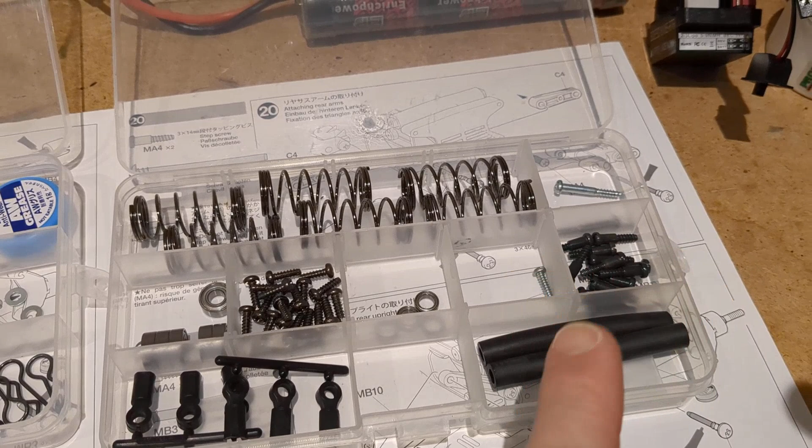Let's start over here. You get some rubber inserts for the shock absorbers, so they're not just spring, or oil dampers - these are the rubber-like resistance shocks. I have had these before, can't remember what build, definitely on the Ford Escort I've got. Here's your springs, 6 shocks because we've got 6 wheels, various step screws, various ball bearings. These are the shock absorbers themselves.

Then over here we've got some split pins. These thicker springs are for the bumper, I believe. These will be the wheel nuts. These ball joints, I think, will be for the steering. Various other rods and ends. So that's what's in the C parts bag.

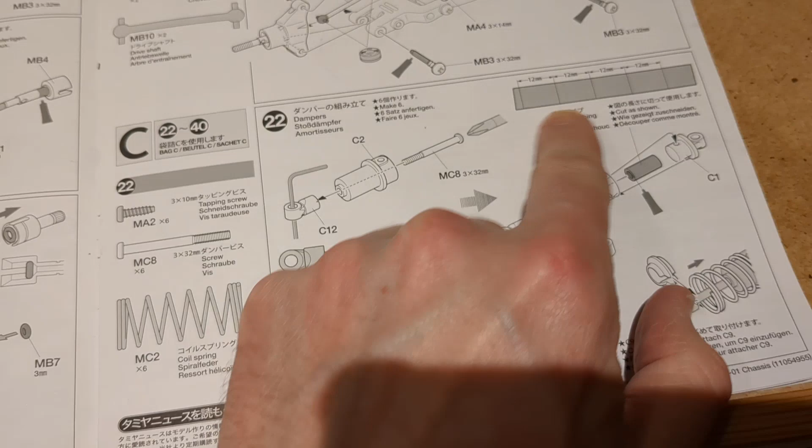Let's just move them aside while we have a quick look. So the C parts bag starts with making the dampers, which, as I said, you get these rubber bits and you cut them to size and put them inside the shock absorbers, and it's the rubber, I suppose, that offers the resistance. Probably can upgrade them to oil-filled shocks, whether people do or I will, not sure.

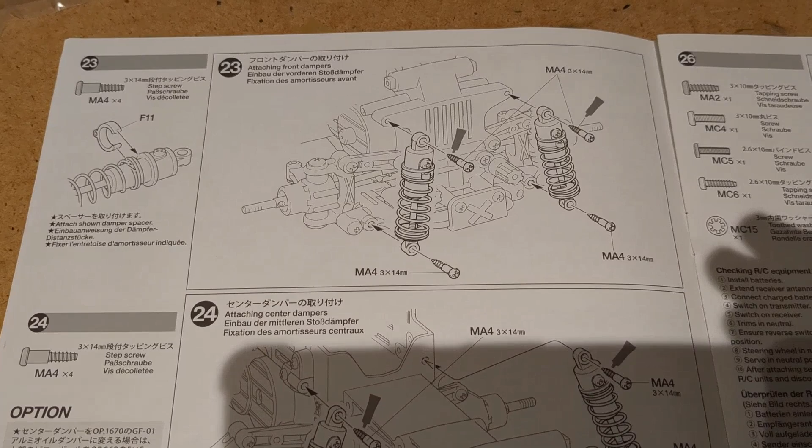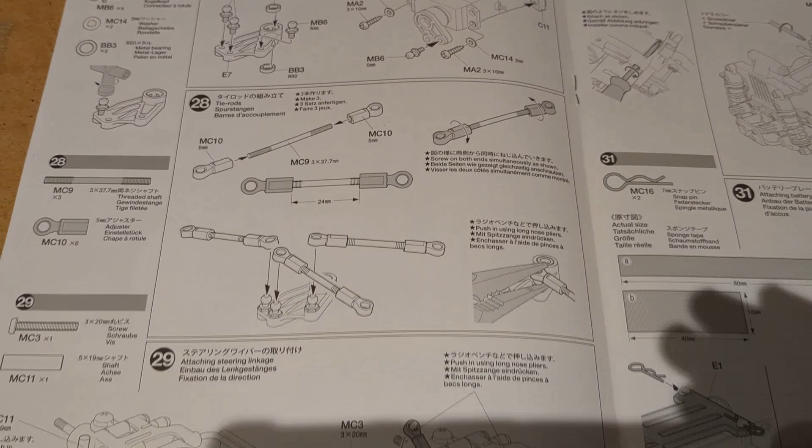Attach front dampers, center dampers, rear dampers. You've got some work with the electronics. This is the servo here, which I have in this bag. So we get up to step 27 and look at the whole steering mechanism, and it looks fairly complicated how it connects. And then the servo goes onto the side of the body.

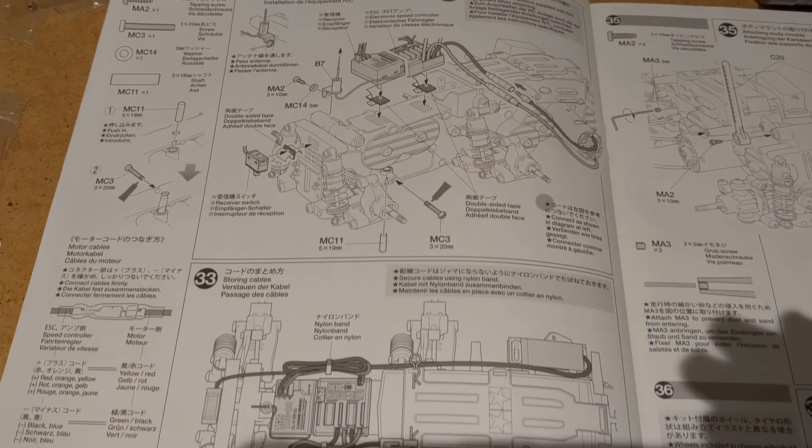The battery cover is going to go on the top here. And then nearing completion, the rest of the electronics go on - receiver, speed controller, tidy up the wiring, bumper goes on.

Wheels go on - it's the body mounts, by the way. Wheels go on. Takes us up to final step, which is the front bumper, the big heavy spring front bumper. Then it gets us up to the body shell, so I'll probably do another video somewhere along the way. But for now, that is what's coming up next, and that is the C bag.

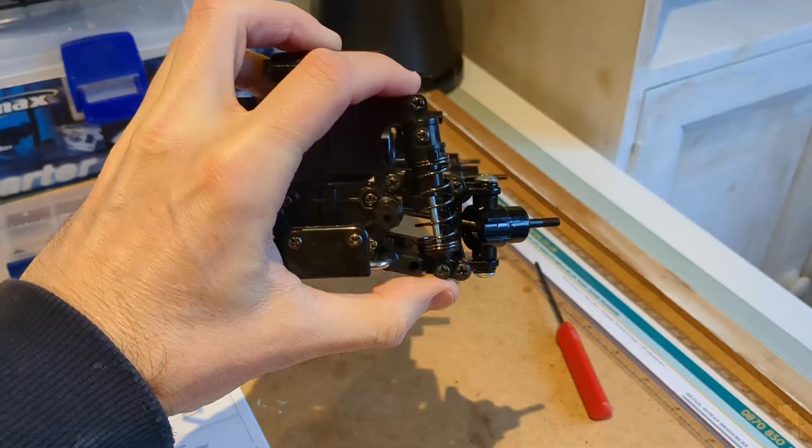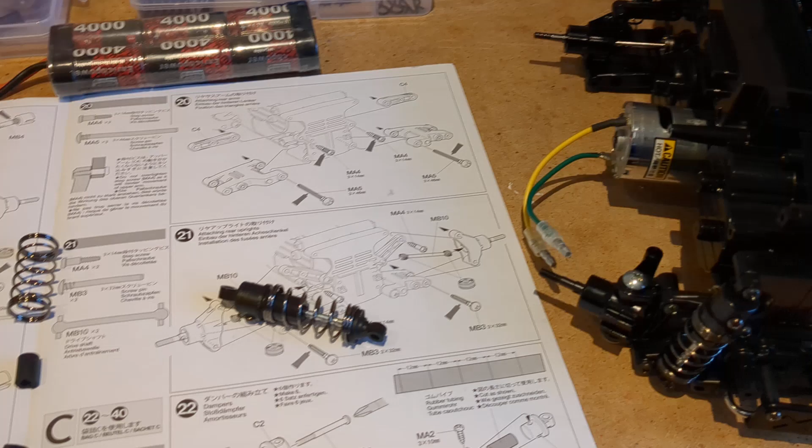Right, just a quick video to update you on the shock absorber build. So I've got various different Tamiya models. Now, as you know, different types of shock absorbers in all of them. I have done some of these before, but it's always a bit of interest to show you the shock absorbers.

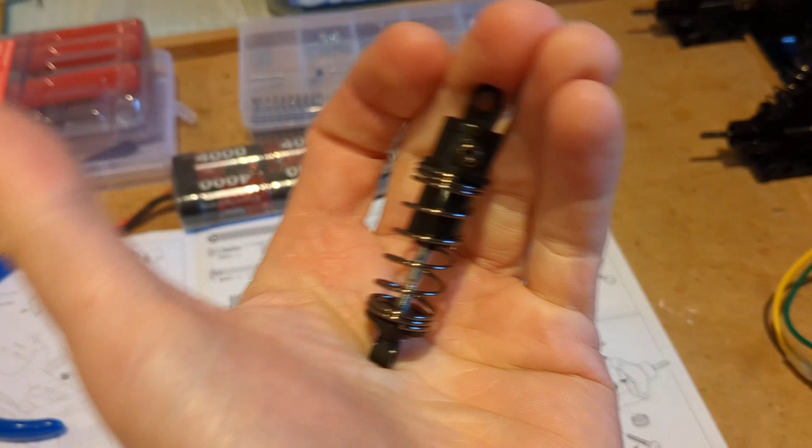So I've built and mounted 4 already. Here's one that I need to mount, already built. I'll show you what goes into them. Some Tamiya shock absorbers are oil filled, some are just, I suppose, friction shocks by spring.

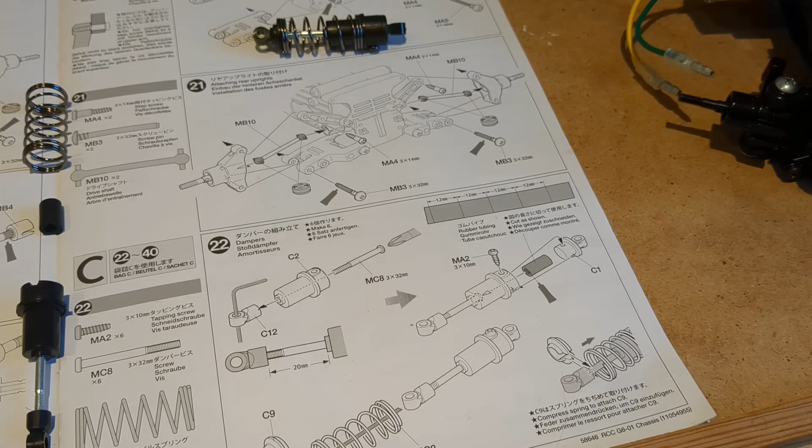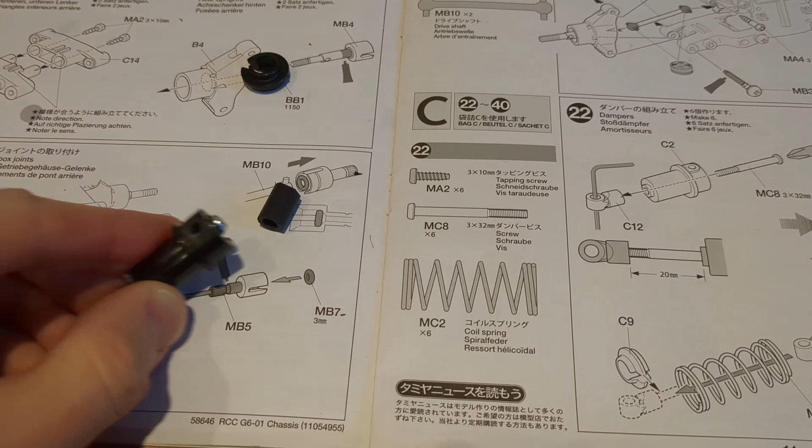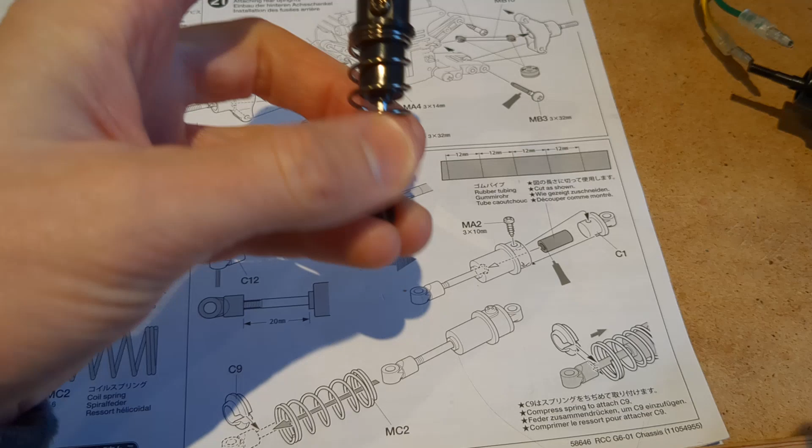These ones come with a bit of rubber tubing, and you cut down to size the little rubber inserts, and then what happens is the rubber insert goes over the screw. You put a bit of grease on it, and it's that rubber insert, I suppose, rubbing with the screw that provides a little bit of resistance. You put the spring on, put it all together. So these aren't oil filled, but they're not just pure springs.

So there we go, that's the shock absorbers on the Konghead.